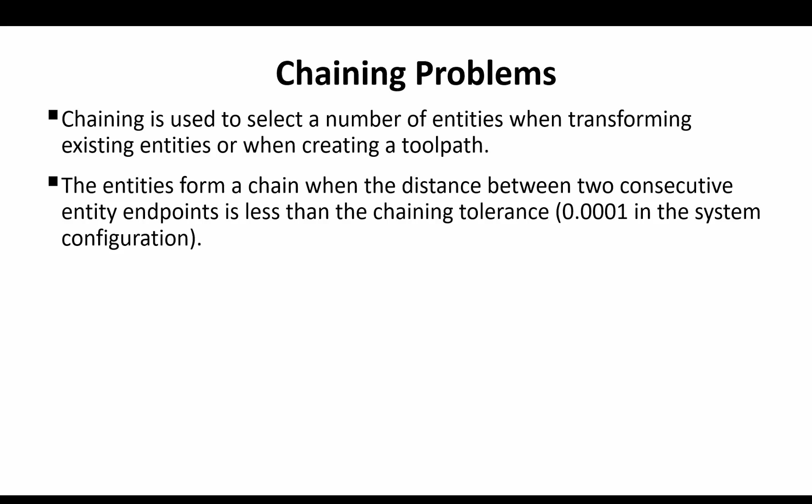Chaining does several things. It selects and sequences the geometry used to control the machining path, sets the machining direction, and if the chain is closed, it sets the start point for the toolpath. Most of the 2D toolpaths involve moving a tool around a profile of entities called a chain. A chain can consist of wireframe geometry or the edges and faces of solid bodies.

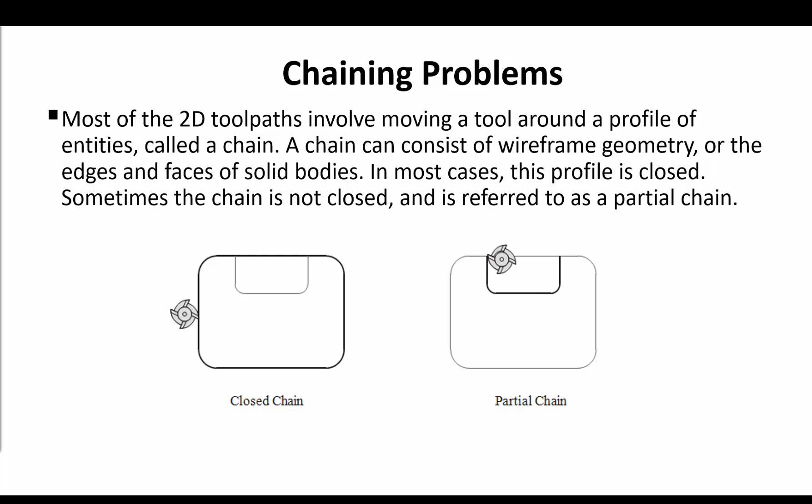In most cases, this profile is closed, but sometimes the chain is not closed and is referred to as a partial chain. The most common chaining errors are caused by the following problems: small breaks or untrimmed entities, entities that do not lie in the same plane, duplicate entities, overlapping entities.

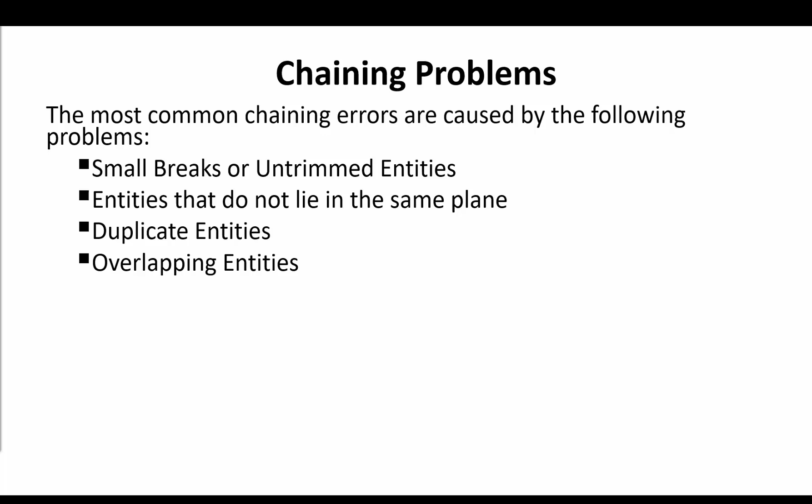It is not uncommon for wireframe drawings to contain errors that cause chaining problems. For example, two lines have been drawn where only one is needed. Very small gaps between entities may not even be visible at zoom extents. Good drawing practices, including the use of the auto cursor and trim functions, will avoid most problems. But even the most careful person makes mistakes. Therefore, it is a good practice to check the integrity of wireframe chains before starting to create toolpaths.

Small breaks or untrimmed entities that are extended over the intersection point can be avoided by using the auto cursor to ensure the entities connect. One way to find small breaks or untrimmed entities is using Display Endpoints from the Home tab. This function temporarily places a point at the end of each entity. Small gaps are often obvious as they appear as points that are noticeably brighter than others.

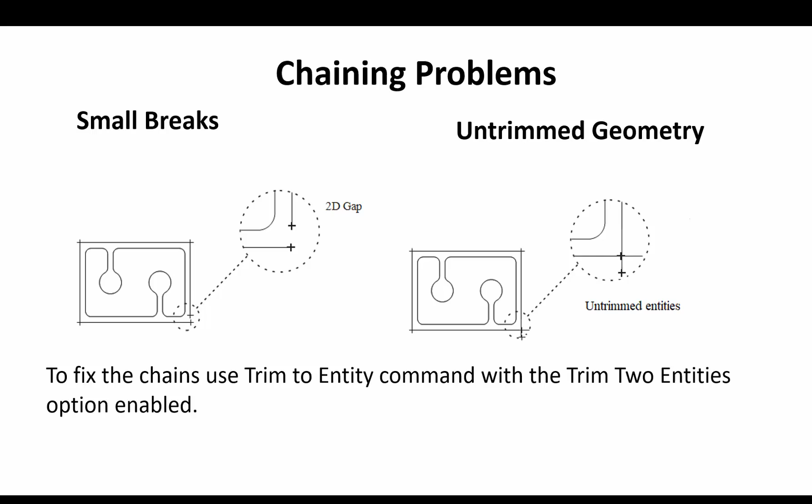Zooming in on these areas may reveal 2 points close together, one at the end of each entity, as you could see in the screenshots. The best way to fix these gaps or untrimmed entities is to trim the two entities using the Trim to Entities command.

Another type of break occurs when entities in the chain do not lie at the same depth. When viewed from the top, the chains appear to be continuous. Changing to an isometric view reveals one entity at a different Z value than the others. To fix the chain, you will have to use the Transform Project command.

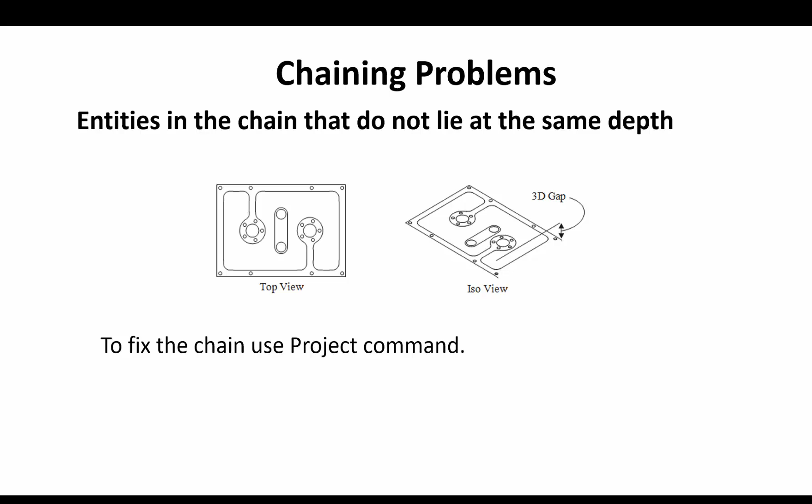Duplicate entities are identical entities that are created in the same plane and share the same endpoints, or for arcs, the same center and radius. You can configure Mastercam to automatically find and delete duplicate entities every time you open a file and provide an online summary of the types and number of duplicate entities that were deleted. This setting is on the File page of the System Configuration dialog box.

Note that this option does not fix duplicate entities that you create in the geometry in the current session of Mastercam. To fix the chain, you should use the Delete Duplicates command.

Overlapping entities share only one endpoint with another entity and can be very difficult to detect. Consider, for example, the profile shown. It consists of 4 lines connecting points P1, P2, P3, and P4, and an extra line between the points P3 and P5. This line shares an endpoint with line 2 at P3. The other end of this line is not shared with any other entity.

When Mastercam tries to chain this profile, chaining stops at P3. Mastercam reports the message: branch point reached, select next branch. Mastercam does not know if you want to follow the path along line 3 or along the extra line. The first indication that something is wrong is that chaining does not start and end where you expect it. Normally, chaining starts at the beginning of the selected entity.

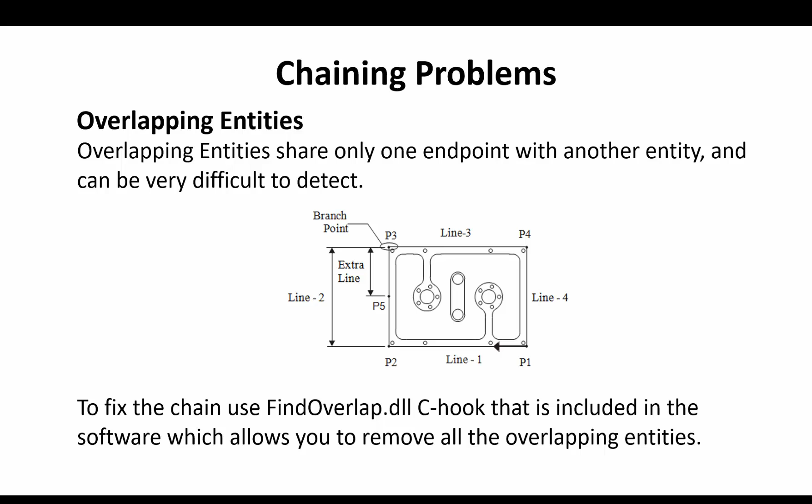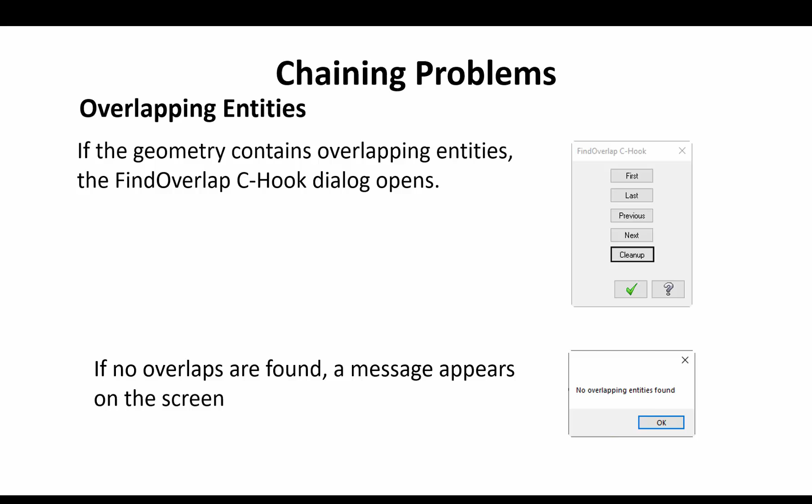To open the C-hook directory, you can press Alt-C, or you can select the Run Add-in command from the Home tab. Find and open the Find Overlap DLL in the directory, and then make a window and include all the entities that you want to check. If the geometry contains overlapping entities, the Find Overlap C-hook dialog opens, and you just need to click on the Cleanup button. If no overlaps are found, a message appears on the screen stating that.

Next, I'm going to demonstrate how you can fix the chaining problems in Mastercam. The Analyze chain file is already opened. And the first thing that I'm going to check is where I have problems on each of these chains.

The easiest way to check for problems in the chaining is to hold down the Shift key and select the chain. I will select all of the 4 chains, and you can see where the chaining stops for each of them. I know that at those points I have problems that need to be fixed.

Without researching further, I'm just going to unselect all of them by clicking on the Clear Selection button. And I'm going to go into the Home tab and just select Delete Duplicates.

It gives me a report that 2 lines were found to be duplicates, and the system automatically deletes them.

I will again check the chains holding down the Shift key, repeating the same selection. You can see this chain is already fixed. Something was also fixed here - it was showing with magenta color, and one entity was deleted at that point. But we have other problems in that chain that need to be fixed.

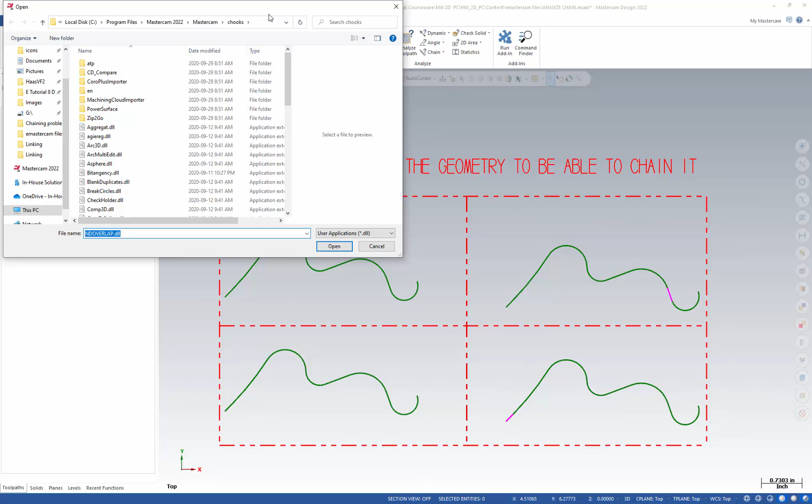Next, I'm going to use the Find Overlap C-hook. To open the C-hook, you can click on Run Add-in or press Alt-C. This opens a directory with other C-hooks that are available in Mastercam.

These are short programs done by a third party or by CNC Software, and they are concentrated on doing a special function. Eventually, they could end up in the software if they get very popular.

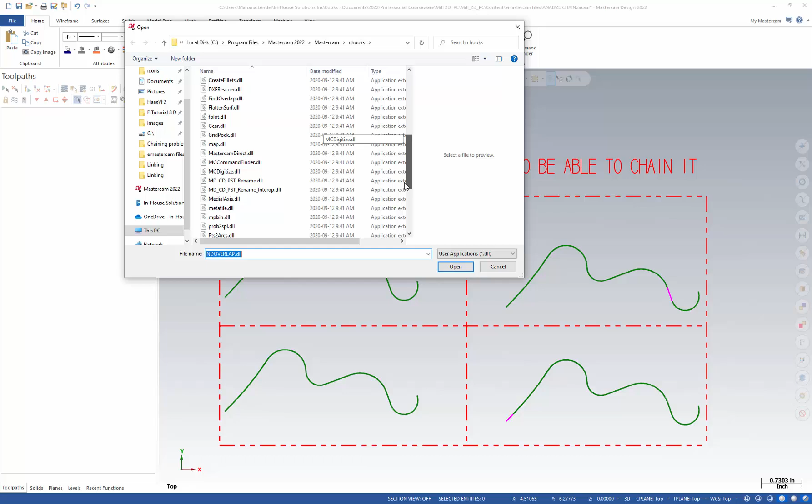I am going to select Find Overlap.dll and just open it. The system prompts you to select the entities to check for overlap. I'm just going to make a big window around the geometry and then end the selection.

You can see the Find Overlap C-hook dialog box appears, which tells you that there are some issues. It also highlights the first overlapping entity. If you want to check, you can just go next. So you can see there was a smaller line that starts at the same endpoint as this line.

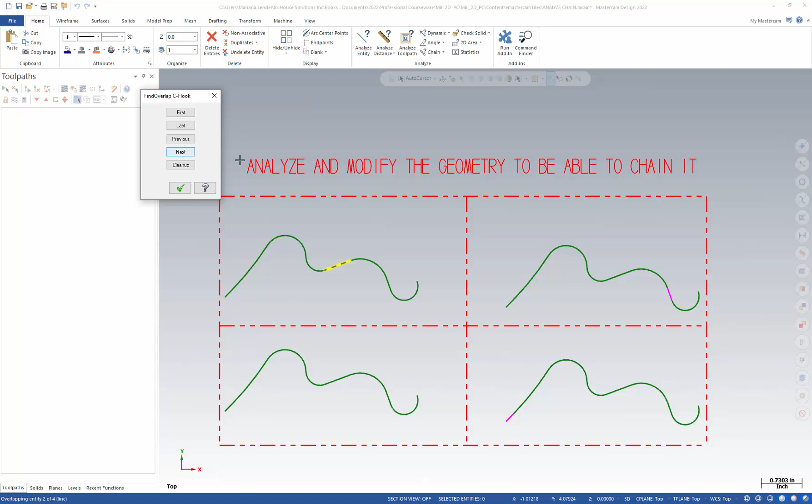I am not going to bother to go through the chain. I'm just going to click on Cleanup, and the system reports that 2 overlapping entities were deleted. I will accept that.

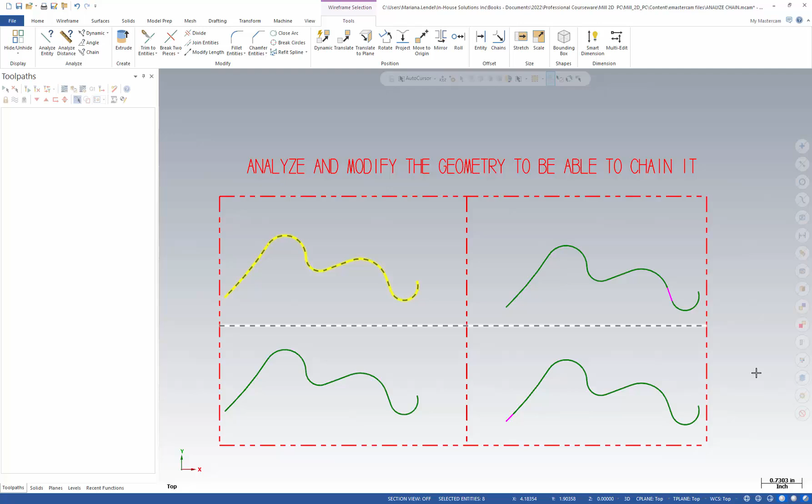And holding down the Shift key, I will just reselect this chain. And now you can see the problems are fixed for this chain. Again, I will unselect them. Currently, I have 2 chains that are fixed.

Let's check this chain. I'm going to do a right mouse click and select the isometric view. Can you see how from the top the geometry looked okay, but the arc and the line are not created in the same plane as the rest of the geometry?

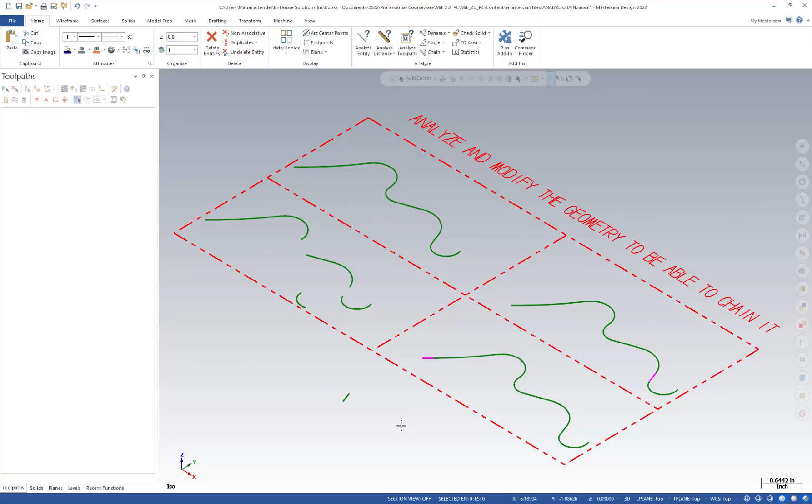I made this quite obvious, but the distance between the endpoints, remember, could be just slightly bigger than 1/10. It could be 2/10, and the chaining will still not work. So once you've fixed duplicate entities and overlapping entities, if you still have a problem in the geometry, you can use the Transform and Project command to ensure that the entities are all lying at the same depth.

I'm going to select the command, and make a window around this chain, holding down the control key to ensure that I'm not grabbing anything else, and click on the opposite corner to select the chain and end selection.

Pay attention not to leave the copy on, because that will create duplicate entities. You want to move entities. And we project all of them at Z0, so the depth is set up to 0 in the current construction plane that was already selected, which is the top construction plane.

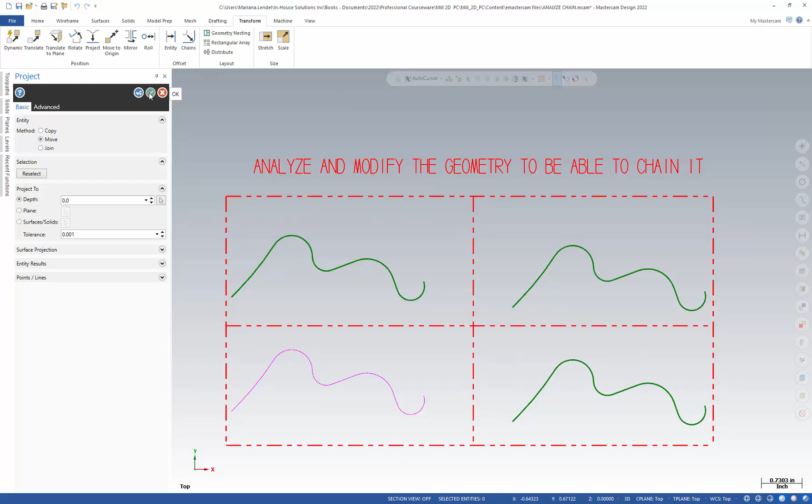Now I can just select the OK button to exit, and holding down the Shift key, I can check this chain. Everything looks okay. Unselect the chain and maybe get rid of the result color by doing a right mouse click and select Clear Colors from the mini toolbar.

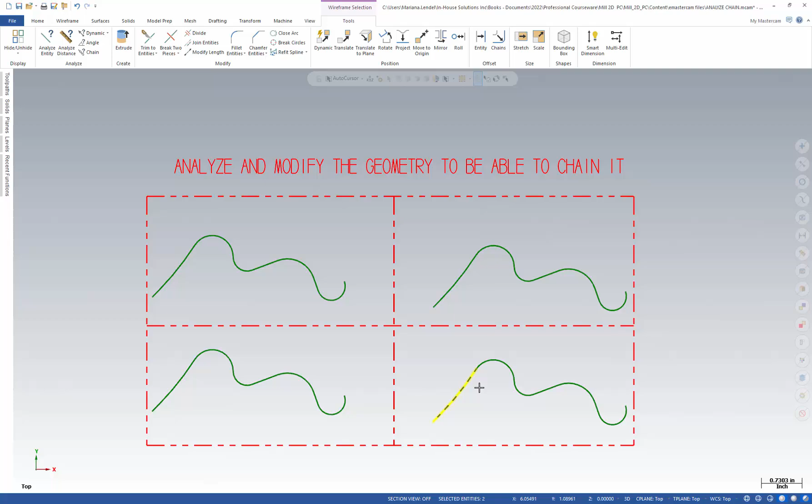The last chain has the trimming problems. So holding down the Shift key, I select that segment of the chain. If we zoom in a lot, it might still be difficult to see, but you can see one entity is not trimmed to the arc. This line is actually untrimmed.

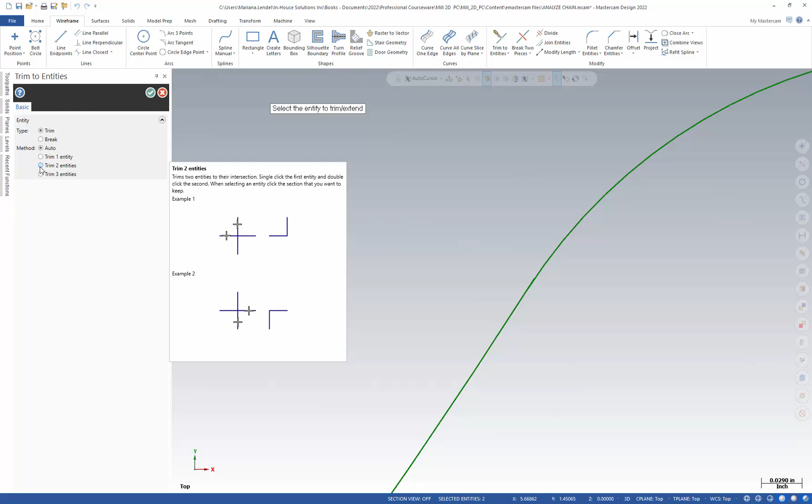And the way you can fix this is using the Trim to Entities command, which I can find in the Tools tab, but you can also find it in Wireframe and Trim to Entities. Ensure here that the Trim 2 Entities method is selected, and then pick one entity.

You can see it's slightly bigger here. You can see it's not stopping at the intersection. So you select the first entity where the chain stopped, but it included, and then the next entity that the chaining did not select.

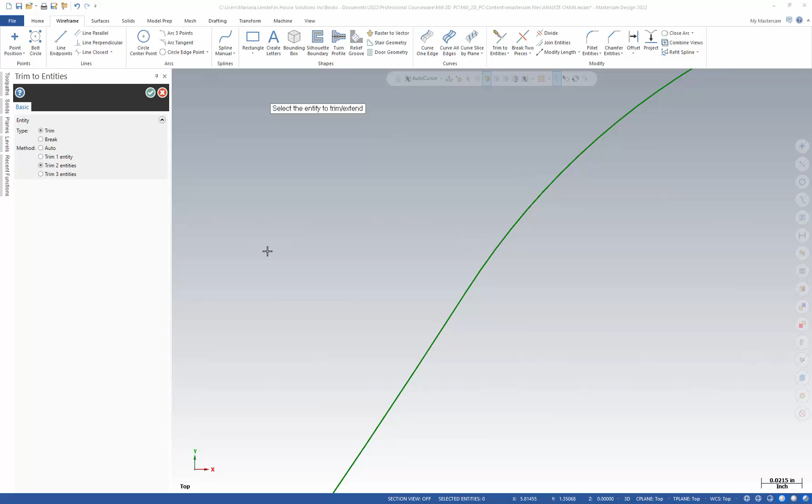I'm just going to do a right mouse click and select Fit to fit the geometry. I'm going to exit the Trim to Entities command. And then holding down the Shift key, I will reselect the chain.

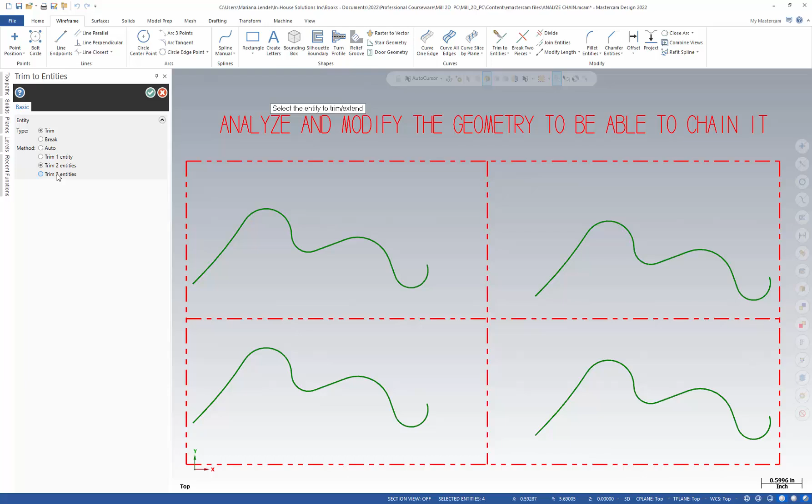You can see the problem is now between the arc and the line. Again, we can zoom in, or we can just select Trim to Entities and make sure that the Trim 2 Entities method is on.

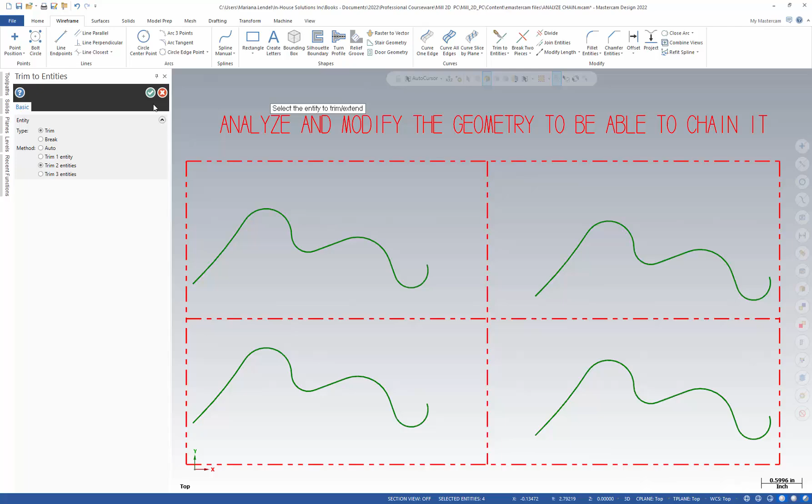And I will select the arc that was selected with the chaining, and then the line that the chain option did not select, and exit Trim to Entities.

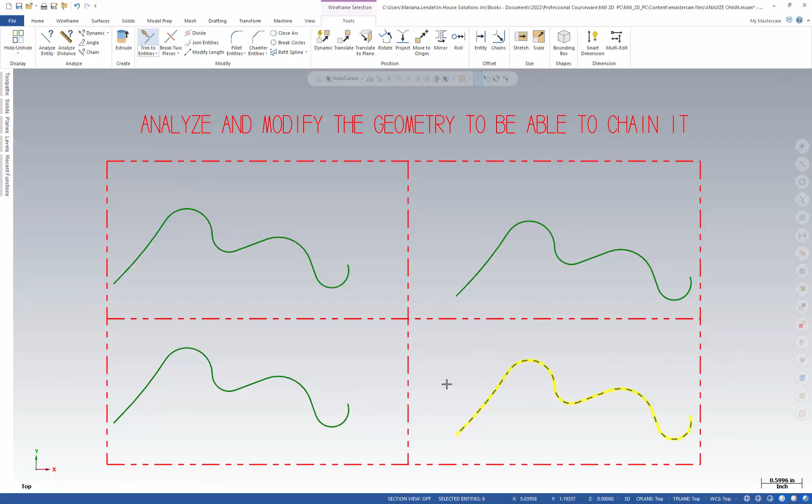And again, holding down the Shift key, I'm selecting the chain. As you could see, right now it's fixed. And if I hold down the Shift key, I can select all the other 3 chains. They are all fixed, as you could see.

And this concludes the video on chaining problems and how they can be fixed.